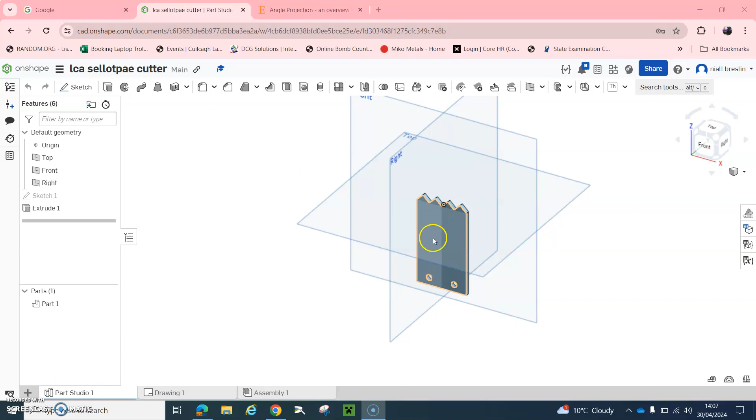In this video, what I want to show you how to do is to convert your isometric drawing into a working drawing. So this is what you're going to end up with here. And what it is basically is we're going to show a view looking straight from the front, from the side, and from the top. So what's called an elevation, a plan, an end view.

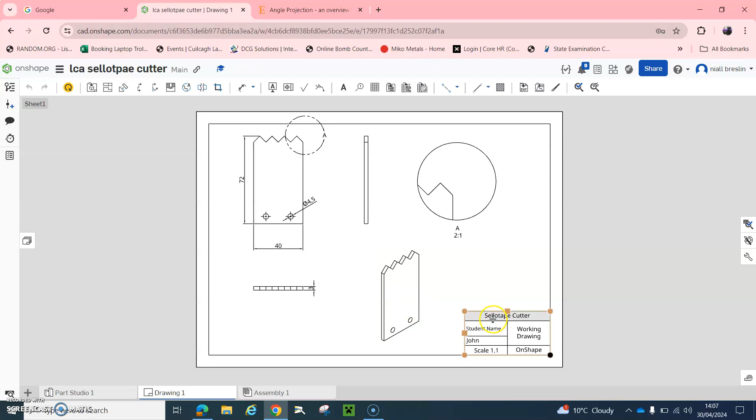We're also going to put in some dimensions into this drawing. We're going to do a detailed view of a certain part of the drawing. We're going to make an isometric drawing, and we're also going to do a title block down here in the corner. So if we go back to your cutter that you've drawn, down here you're going to see a plus sign, and you're going to see create a drawing. This will come up next.

Now what we're going to do is we're going to go custom template, ISO, A4 millimeters. This one here, first angle projection. We're going to include a border, 0. So yours might have 4, but you're going to have to go 0. All right, start zone, bottom right, title block, do not include. Okay, and click OK there.

So next, it's going to ask us what part do we want to put in. So we're going to click this part 1. And you can see it's going to give us our elevation. And if we scroll down here now, then it's going to give us our plan. Now, as you can see, this is kind of small. So I'm just going to click on that there. Escape, sorry. Hit delete and delete.

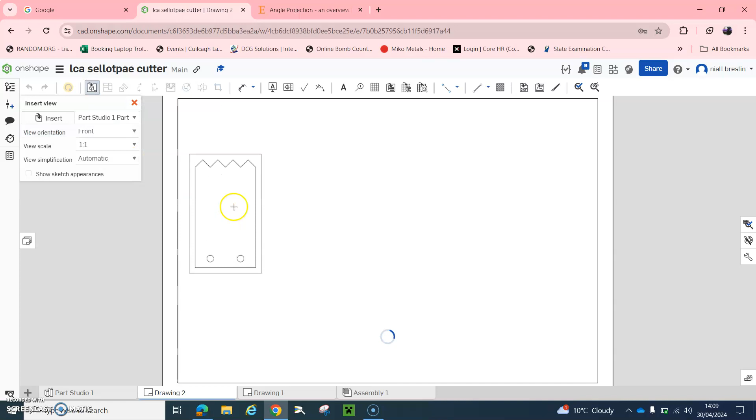And I will go back here now, and then I'm going to insert view. Now, you can insert any view you want, front view, side view, etc. But you can also insert what scale you want it at. So if I insert this here, you can see now it's much bigger, filling up much more of the space in the drawing, because we want to leave a minimal amount of blank space around the drawing. So you're going to have to mess about with the scale to see what fills up your sheet the most. So we're going to put in our elevation.

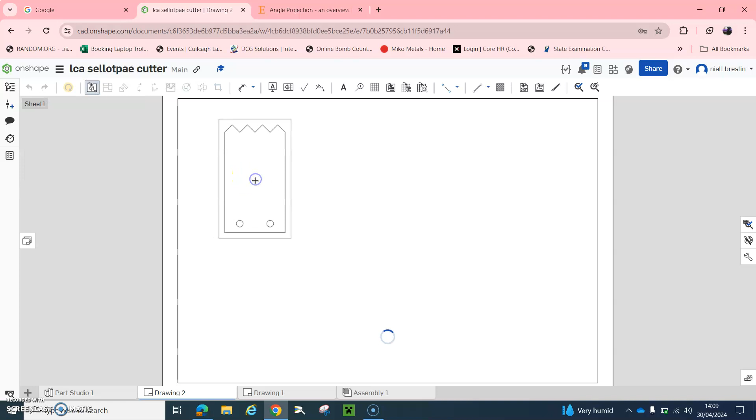Then we're going to go down and we're going to fill in our plan. It doesn't matter the gap that you leave here. Okay, now if you click on it and you drag it over to the right, then it's going to do our end view for us. So we go back to our drawing. What else do we put into this now? So we've got our elevation, our plan, and our end view.

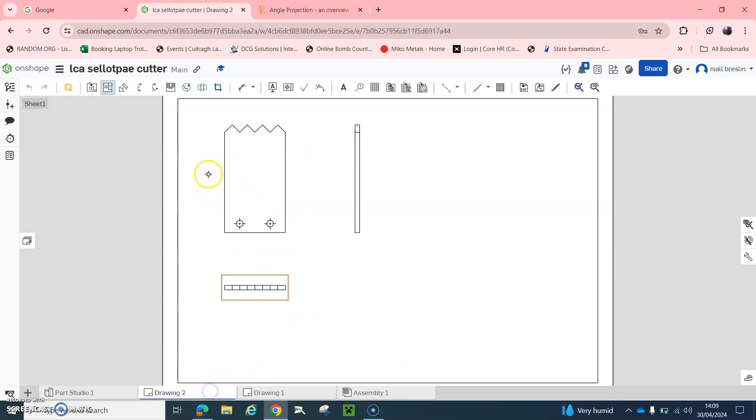We want to put in a few different dimensions into this drawing. So if we go up here, we'll see here, it's got dimensions. Now you don't have to put in every single dimension. I just want to be able to see that you can actually put in a dimension. So we'll drag this out. We'll put in a few of the main dimensions. So the thickness of the piece, the width of the piece.

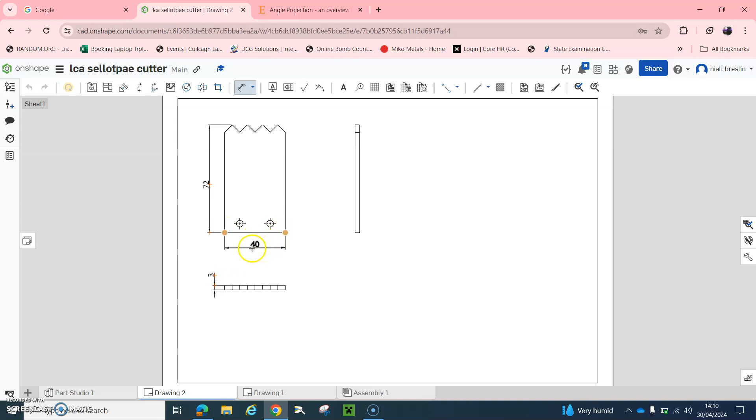And it's no harm to put in a dimension of a radius or a diameter. Okay, 4.5. Now, that's okay. That's all we need to put in is those few main dimensions. Next, we're going to go back here and we're going to go to insert view. And instead of putting in the front this time, we're going to go in isometric.

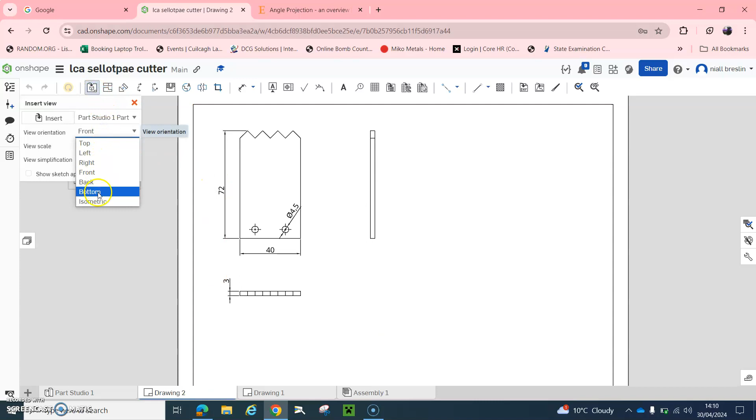And we'll drag this out and we can drop it anywhere at all. And there's our isometric drawing of our project. Next, again, we'll go up here then and we can see here, this one here. So detailed view.

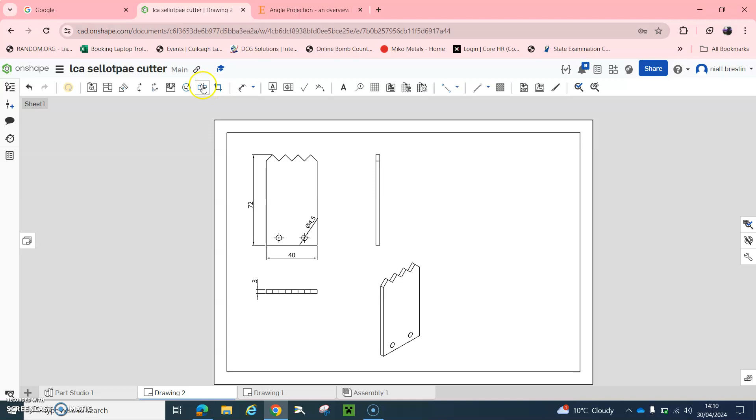And you can highlight then, it's going to ask you to insert a circle. Drag out the circle. And you can see then now we don't want it hiding our end view. So what we can do is we can move it over to here. And that now is a detailed 2:1 scale of that there.

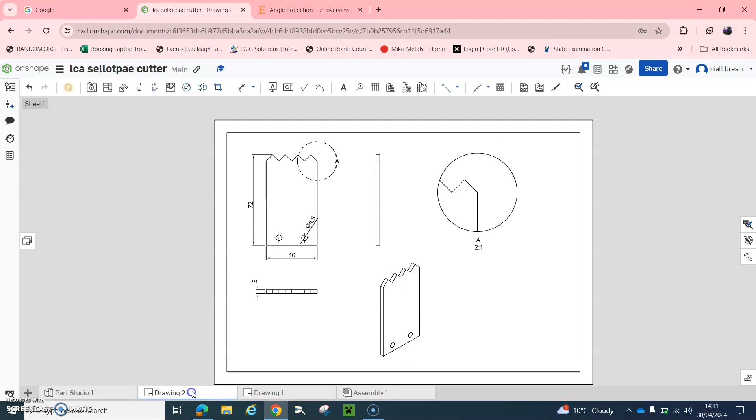All right. So that's that there. All done. Our elevation, our plan, our end view, our main dimensions are detailed and our isometric. Down here now we're going to put in our title block. So up here we can put in table, and we want it 4:2. We want to make sure that it's clicked in the bottom right down here.

And then we're going to go down here to the bottom right and we're going to click where we want it. Okay. Next, what I want to do is just drag this out a bit. Again, the size doesn't matter so much for this one here, okay? What kind of information do we want to put in this here?

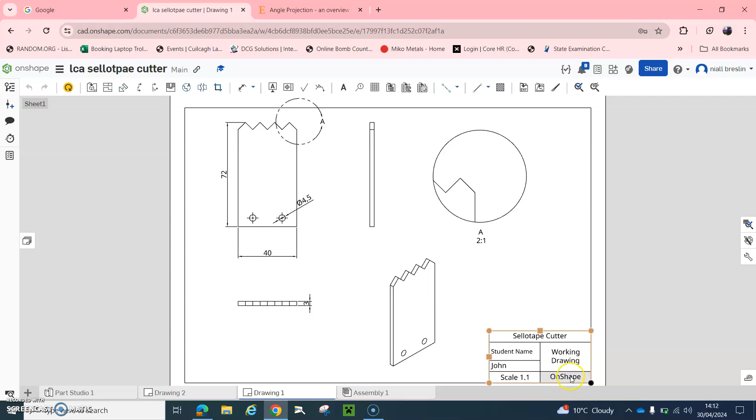So we want to put in what the project title is, sellotape cutter, student's name, and then you put your name underneath here. The scale of the drawing, 1:1. The title of the actual thing is a working drawing, and the program that we use to draw it on, OnShape. So we go back to our drawing.

Now, you can see that these are two separate cells, but if we highlight one, I'm sorry, and hit the arrow up button or control button, now there we go. So we'll highlight the two of those, and we're going to merge those horizontally.

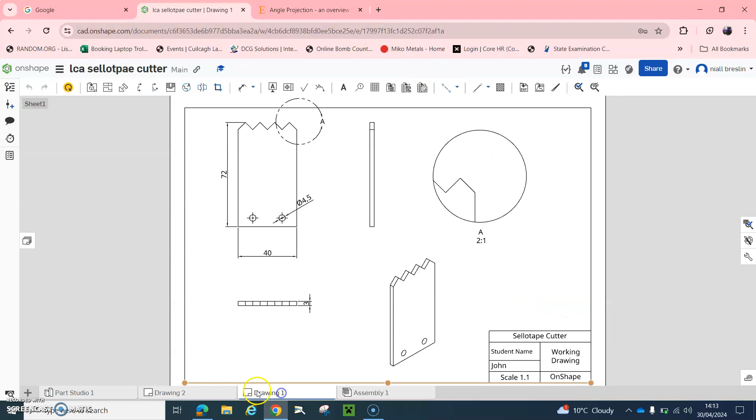Then we're just going to simply highlight the two of these, and we're going to merge these vertically. And then inside in here, if you just click inside, it's going to give you an option to type in. And what are we going to put in there? Sellotape cutter. Now, what we might also want to do is put that right in the center. You can mess about with the dimensions of it, with the style, okay?

But for now, we're just going to type in student name. Now, here's an example. So student name is too big. So what we're going to do is we're going to highlight that there, and we're going to change the dimensions down to 3. So now that way then it's going to fit in nicer into a drawing. Make that go center. And you type in your own name there.

Okay. Put that in the center. Again, you might have to change the size of it to make it fit. Over here, we're going to put in drawing and center that. Down here, we're going to put in scale 1:1.

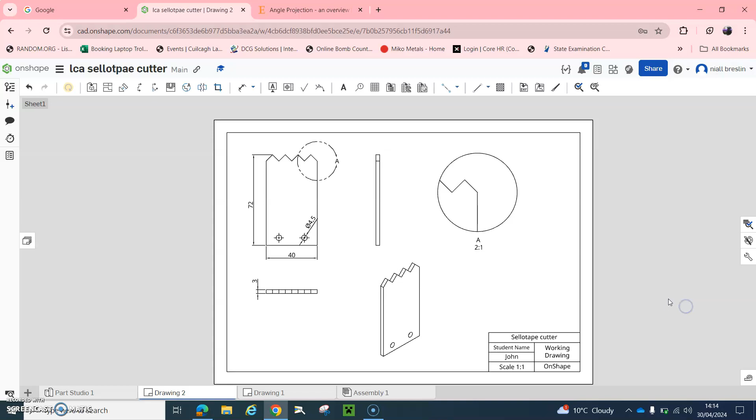Center that. And over here, I'm going to type in OnShape. Again, center that. Now that's our drawing almost complete. One last thing we're going to do, we're going to go in to the internet. We're going to type in first angle projection.

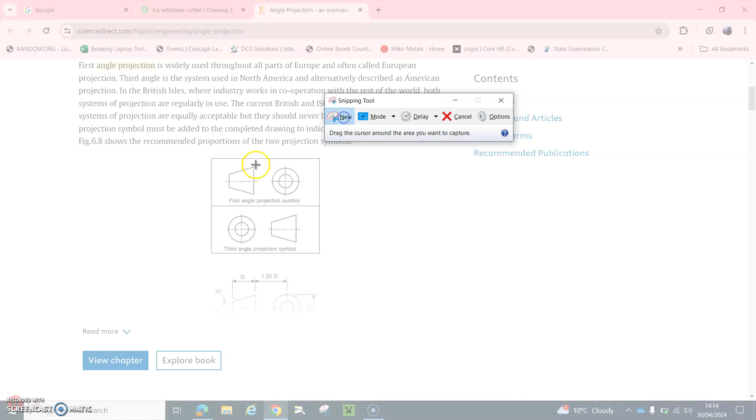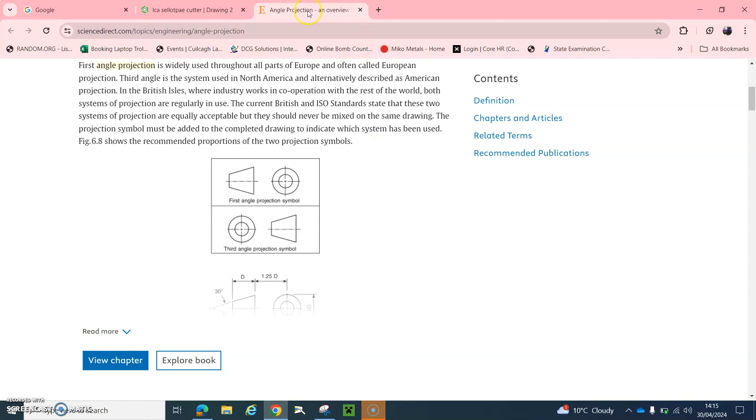And in this case, it's giving me these two, but the one we want is the top one, first angle projection. So we'll go down here to our snipping tool, new, and then we're going to Control C, down to back to our drawing, and Control V. I cannot paste information for some reason. Oh yeah, sorry. Here we go. Insert image.

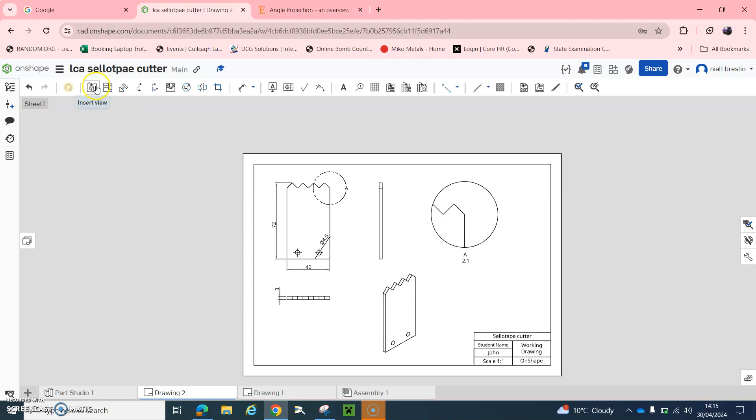Sorry. Import. So we'll just go back to our snip file, save as, and save this into my pictures. First angle projection. Save. Back here then, import.

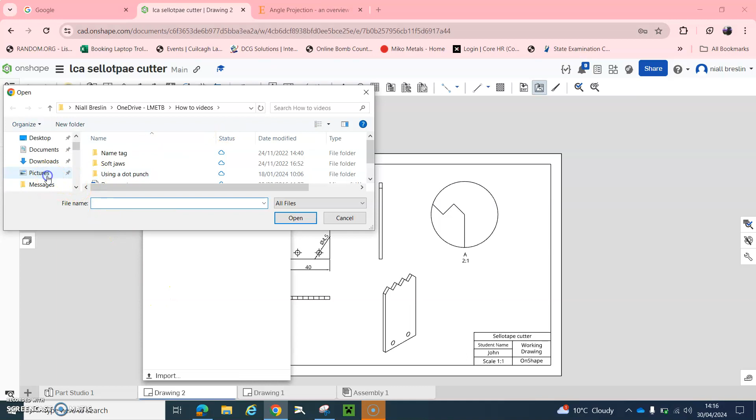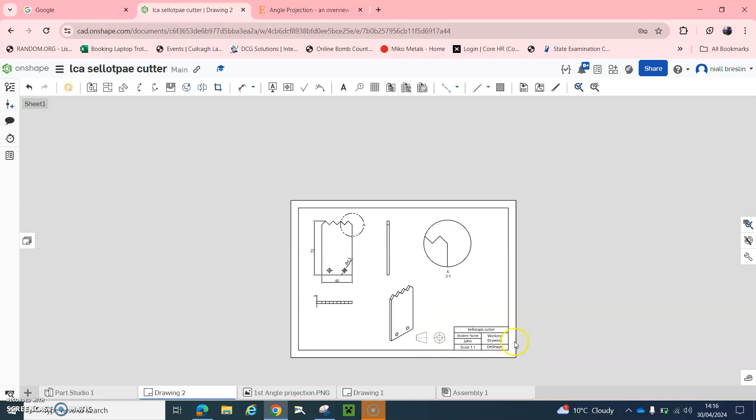Find pictures here. First angle projection. Here it is. And we're just going to put it down here, like so. Okay, and that's our completed working drawing of our sellotape cutter.